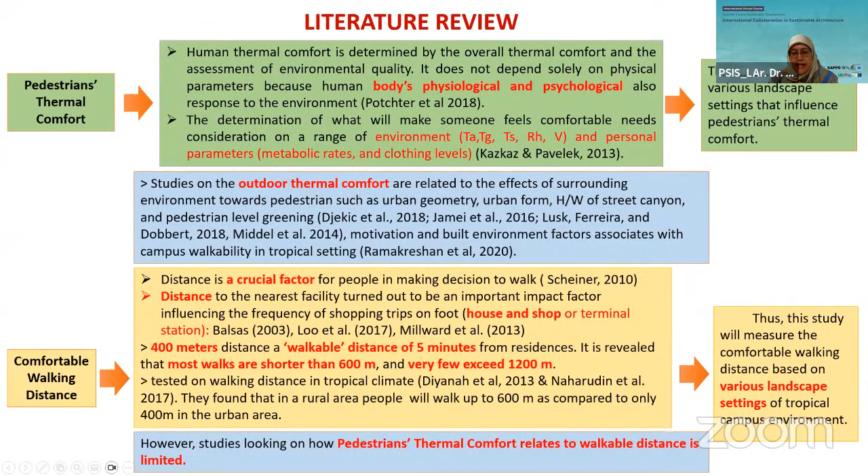So this study will measure the comfortable walking distance based on various landscape settings of a tropical campus environment. However, studies on how pedestrian thermal comfort relates to walkable distance are limited.

Now I will explain the Landscape Environmental Setting for Pedestrian, which is LESP. This term was coined by Kasim et al. 2018. This is sourced from my 2018 paper, 'Use of Landscape Environmental Setting for Pedestrian to Enhance Campus Walkability and Healthy Lifestyle,' published in WIT Transactions on Ecology and the Environment.

Based on this study of 5 campuses in Malaysia, 5 types of LESP were identified: type 1, type 2, type 3, type 4, and type 5. For type 1, there is no shade at all. From the illustration, we can see only pavement is the landscape element in the walkway environment, alongside a human figure. Actually, LESP is a microclimate for pedestrians when they walk, either on a campus or in a city.

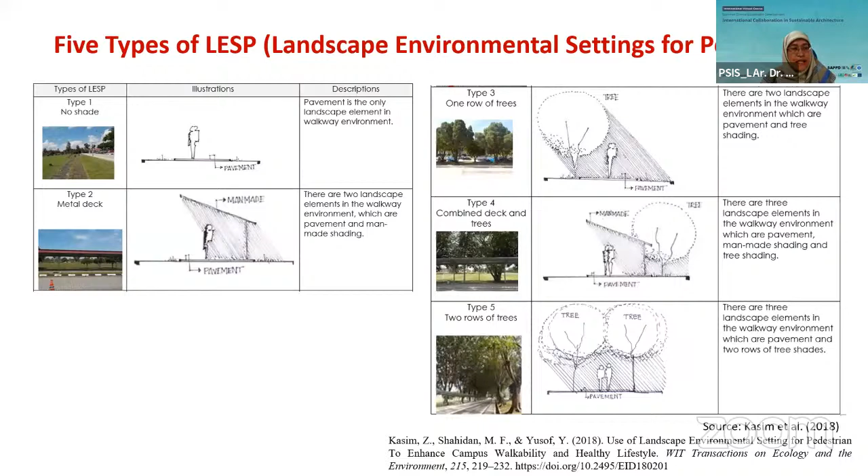After identifying the 5 types of LESP, we did field measurements of 5 microclimatic parameters, which I mentioned just now: air temperature, surface temperature, globe temperature, velocity, and relative humidity, at the 5 types of LESP on a campus in Malaysia.

For the parameters, we used apparatus that are easy to carry - five instruments used across all 5 types. For this data collection and field measurement, we did it at the same time for all these 5 types.

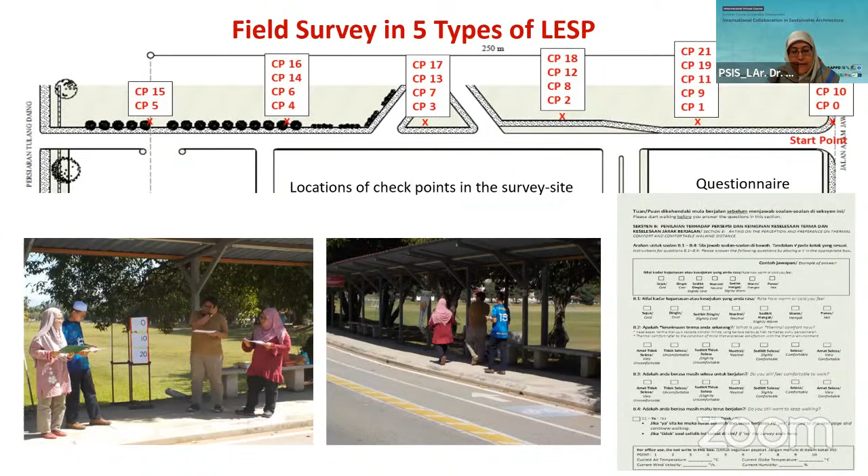Then the summary result of the survey for all types of LESP in the study, using the mean. The question B1 is for the thermal rate, TR; TC is thermal comfort, question number 2; question number 3, walking comfort; and question number 4 for walking distance. Sorry. So this slide already has LESP type 5 first; I arranged it accordingly.

For the thermal rate, slightly cool, thermal comfort slightly comfortable, walking comfort slightly comfortable, and surprisingly the comfortable walking distance, when rounded, is around 1 kilometer. Pavement and 2 rows of trees in LESP5 are the landscape elements in the walkway environment. Results from field measurement and field survey agree with the prediction that pedestrians felt most comfortable and walked longest in this type of LESP environment. Trees with dense and wide canopies act as a shading device, moderating heat transfer from direct solar radiation to the ground.

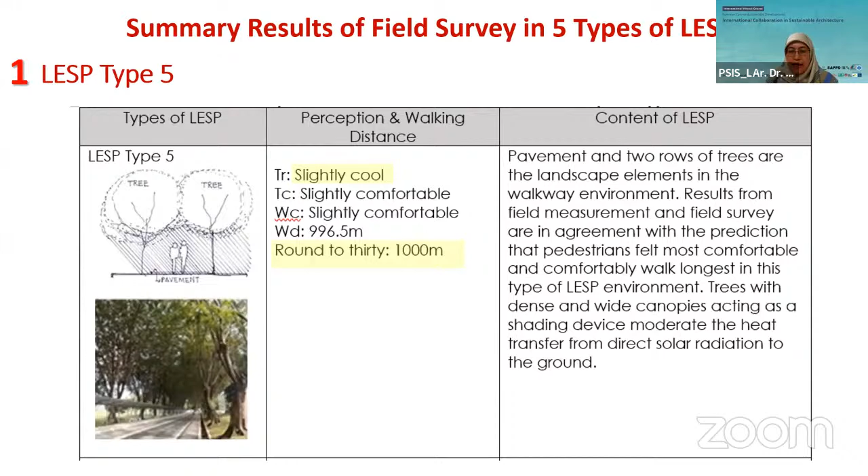Next, the second LESP, type 4. The thermal rate is neutral, thermal comfort also neutral, and walking comfort neutral, meaning the participants feel neutral. The comfortable walking distance is 800 meters. Pavement, trees, and man-made shade are the landscape elements in the walkway environment. The field survey shows participants felt better for TR, TC and WC, rating neutral on all three factors. Both results are similar to the earlier prediction that pedestrians will feel comfortable in this type of environment. This result proves that trees and man-made shading, a covered walkway, provide a comfortable walkway environment.

Okay, for the LESP type 2, for the thermal rate, slightly warm. For the thermal comfort and walking comfort, they feel neutral. And the comfortable walking distance is 650 meters. Pavement and man-made shade are the landscape elements in the walkway environment. Results indicate that man-made shading, which is a covered walkway, does provide a comfortable walking environment.

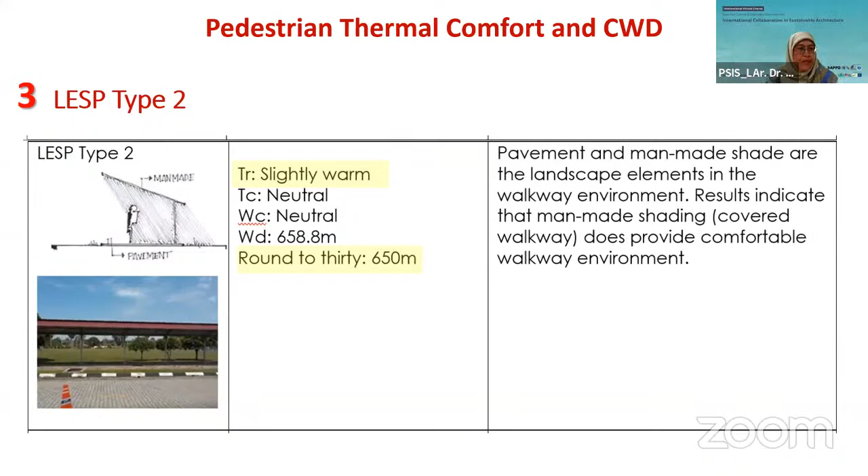Okay, and number 4 is for LESP type 3. For the thermal rate, thermal comfort, and walking comfort, they all felt neutral. And the comfortable walking distance is 630 meters. Pavement and trees are the landscape elements in the walkway environment.

Results of the field survey show that participants felt neutral for TR, neutral for TC, and neutral for WC. The results suggest that trees are a significant influential factor in the perception of pedestrian thermal comfort. Results suggest that tree shading provides a comfortable walkway environment.

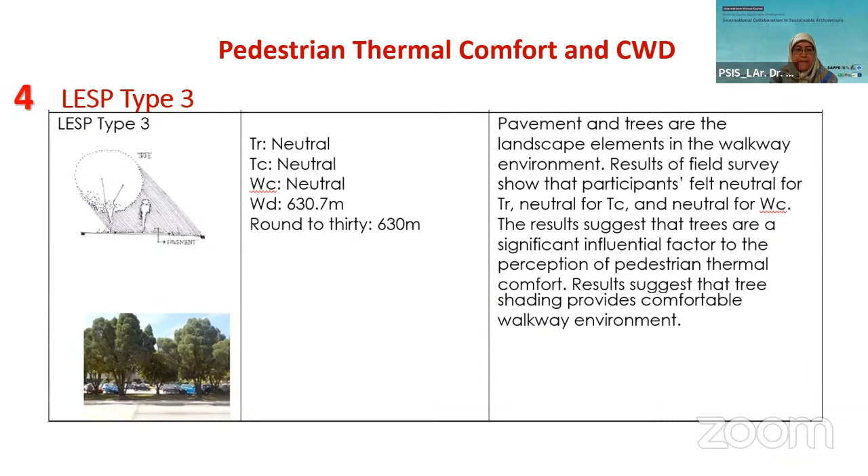Okay, last, number 5, LESP type 1. This one we already know. For type 1, the thermal rate is warm, thermal comfort uncomfortable, walking comfort slightly uncomfortable, and the comfortable walking distance is only 330 meters.

So in this LESP type 1, pavement is the only landscape element in the walkway environment. The results indicate that LESP type 1 creates a hot environment leading to heat stress and does not promote walking comfort for pedestrians. Okay, for the conclusion,

it is important to modify the solar radiation in the walkway environment by having continuous shade from trees or man-made shade, which is a covered walkway, together with tree shade along the walkway. Because, as we saw from the results, man-made shading structures can provide full shade, but the heat reflected from their surfaces can be quite considerable. Trees, however, provide an additional cooling effect as they reduce radiation and provide additional cooling through evapotranspiration.

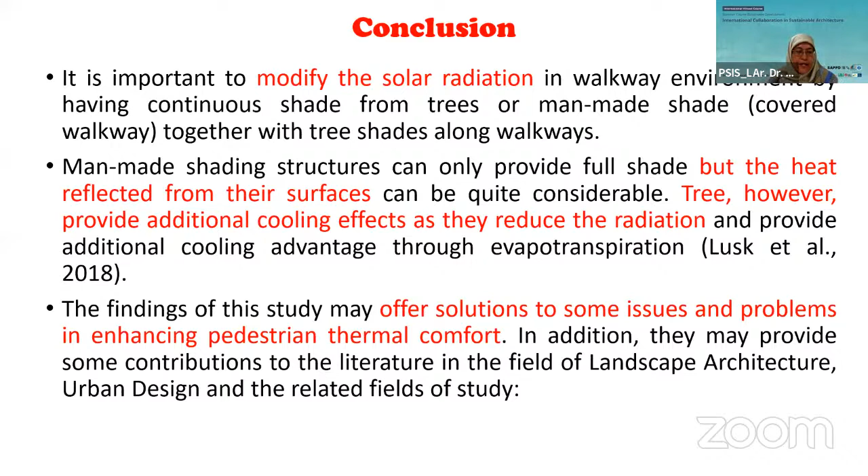Okay, then the findings of the study may offer solutions to some issues and problems in enhancing pedestrian thermal comfort. In addition, they may contribute to the literature in the fields of landscape architecture, urban design, and related fields of study. And last, the conclusion:

identification of landscape and urban setting for pedestrian, or LESP, types in a tropical campus environment, because with this LESP, the designer or the campus management can plan accordingly based on the results of this study. Establishing the relationship between landscape and urban setting and pedestrian thermal comfort. Establishing the relationship between pedestrian thermal comfort and comfortable walking distance in all types of LESP. And finally, it has expanded the guidelines for providing pedestrian thermal comfort on pedestrian walkways in tropical climates.

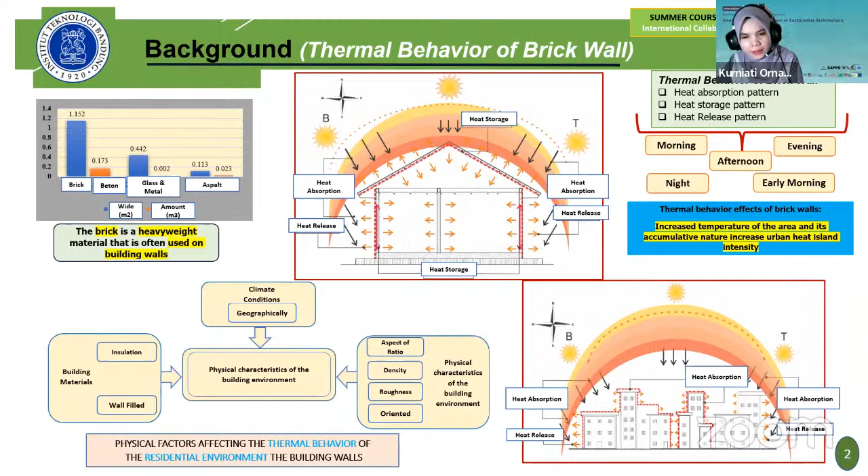And then many literature reviews have been conducted on mitigation technology, such as building shading through self-shading, and vegetation techniques. Additionally, there are methods like replacing heavyweight materials with lightweight ones, using high-performance glass, employing double skin facades, thermal insulation techniques, and engineering the building skin to reduce surface temperatures. However, these methods have not been very effective in controlling the heat in brick walls.

The heat that gets stored in brick walls can be managed by controlling how much heat they absorb from the sun and how they release that heat to avoid overheating. To solve this problem, we need mitigation strategies that follow the laws of thermodynamics, which focus on balancing heat and energy in the walls. This means managing how the heat is absorbed, stored, and released from the brick walls.

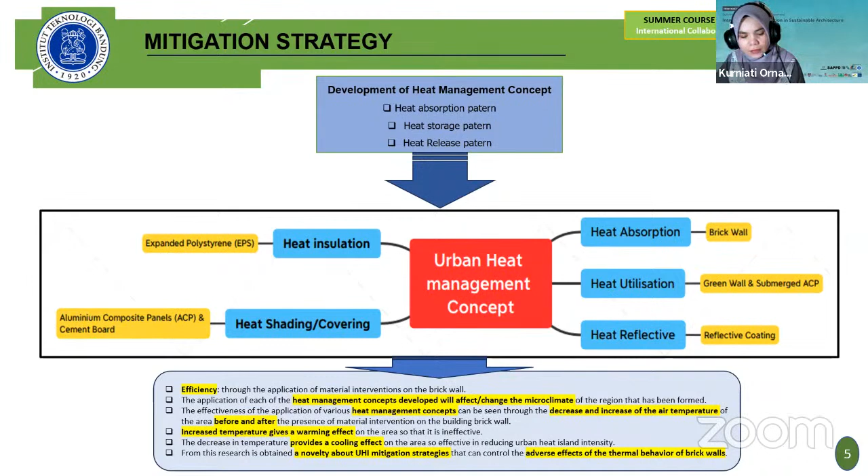And then this research is all about finding ways to reduce the urban heat island effect by managing how brick walls handle heat. We'll try different materials like green wall, submerged ACP, reflective coating, ACP, cement board for shading, and EPS for insulation. We want to see how these materials affect the thermal behavior of brick walls and if they can change the local climate in the area. By comparing temperatures before and after using these materials, we can see if they cool down the area and effectively reduce the urban heat island effect.

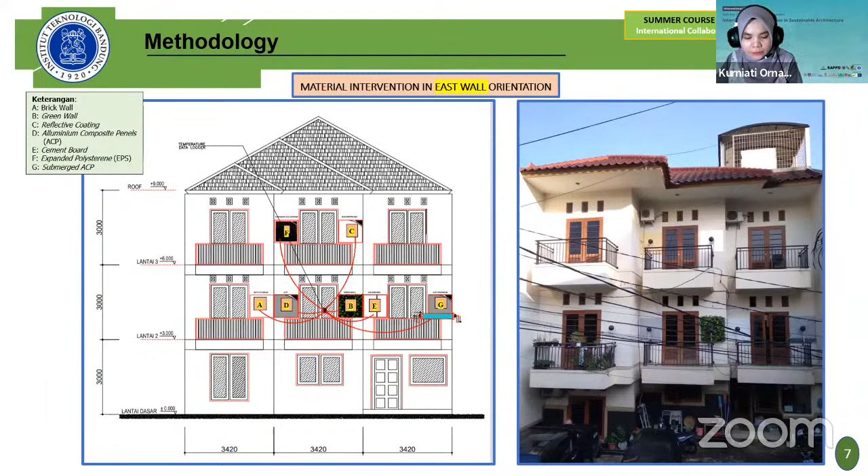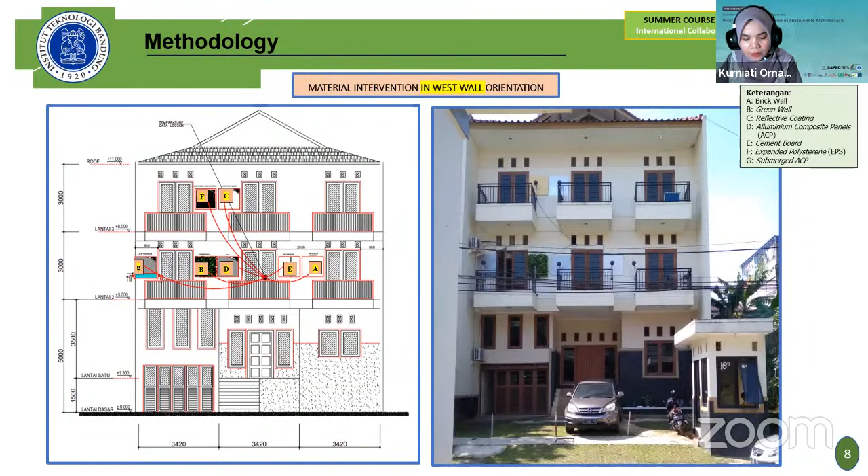on the brick walls. And then the second step involves applying this material intervention in a residential area to see how effective they are in reducing the air temperatures of the entire area. We'll use ENVI-met simulation for this. We start the simulation by modeling the layers of this intervention material on the brick walls, keeping the thermal properties the same as measured directly.

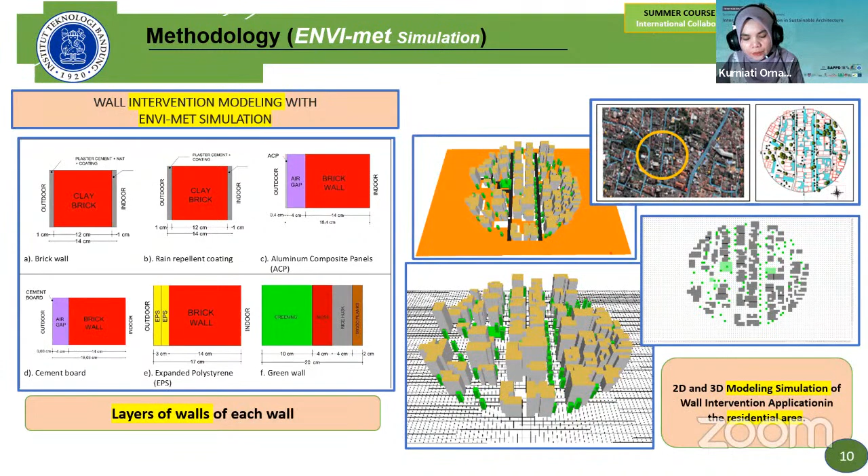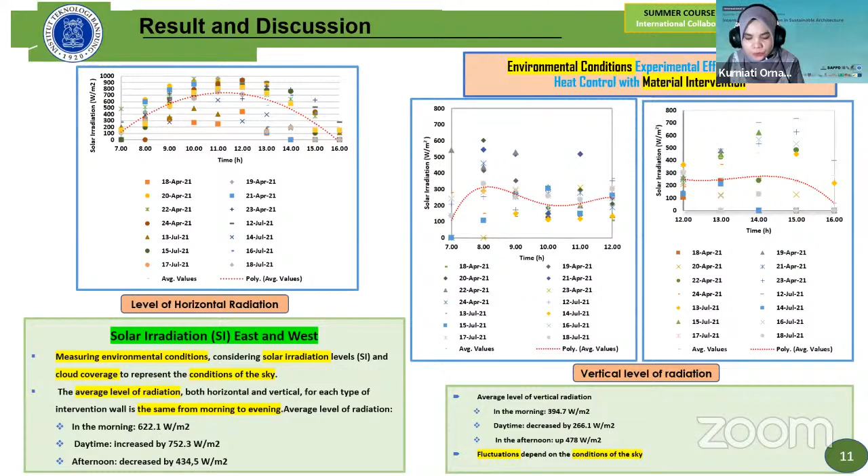Horizontally, for all types of intervention, we observe that the temperatures are higher during the daytime and decrease significantly in the morning and evening. On the other hand, vertically, the temperatures are lower during the daytime compared to the morning and evening, and this fluctuation depends on the sky condition.

And then the sky conditions are categorized based on cloud cover percentage. In the morning and daytime it is mostly partly cloudy, and during the afternoon to evening it is mostly cloudy. The sunlight is affected by the cloud cover. Morning and afternoon are usually cloudier because the wind is lower compared to daytime.

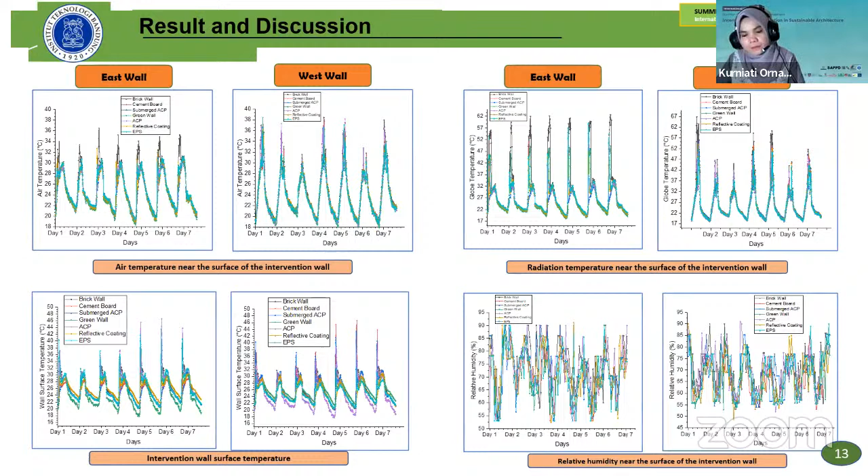In the absorption concept, the reference brick wall saw a cooling effect on the east wall in the morning, but not on the west wall. The surface temperature results indicate an infrared emissivity phenomenon from the wall where heat is released. This causes the globe temperature and air temperature values to increase and be the highest compared to other material interventions, showing heat transfer through conduction and demonstrating the thermal behavior of the brick wall.

In the thermal absorption concept on the brick wall, we notice that in the morning, air temperature and surface temperature values are the same, but globe temperatures differ significantly. This means that the wall surface gets a lot of sunlight, but the surface temperature value doesn't increase much, indicating that the brick wall absorbs and stores heat. During the daytime, the heat storage effect raises both surface temperature and air temperature values.

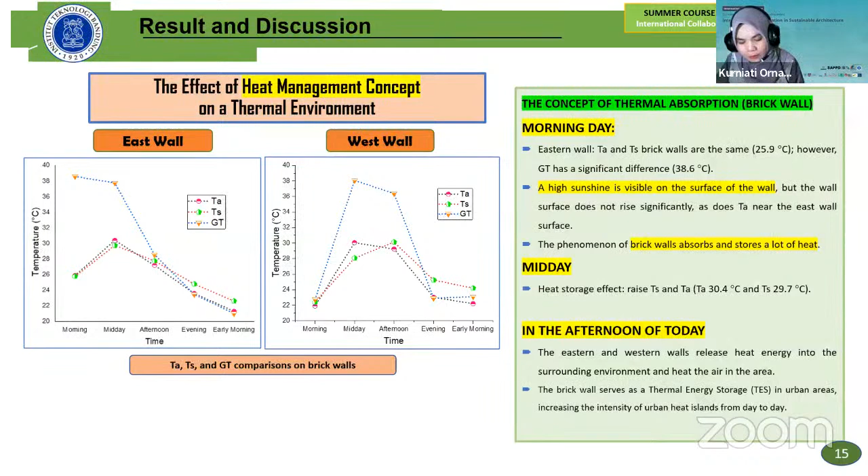However, from afternoon to evening till morning, both the east and west will release heat to the environment, warming up the air in the area. We saw that the brick wall acts as a thermal energy storage in urban areas, contributing to the increase in urban heat island intensity.

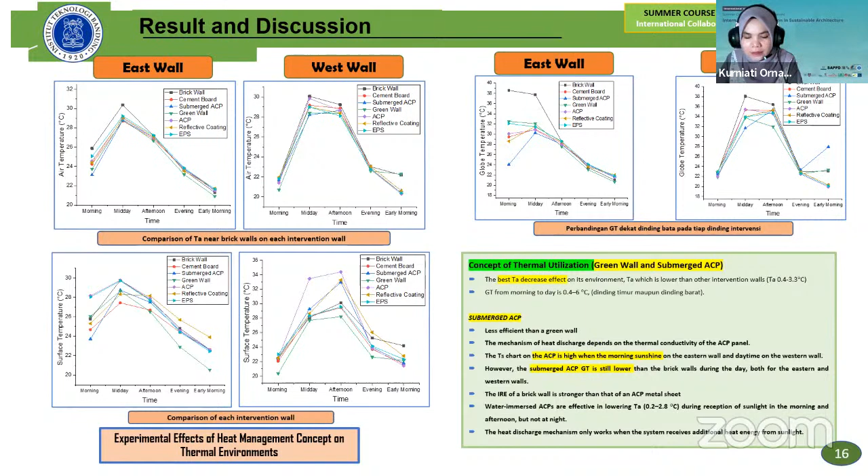And then in the thermal utilization concept, the green wall saw the best cooling effect on its surroundings throughout the day, with air temperature being lower than other interventions. On the other hand, the submerged ACP has a lower effectiveness compared to the green wall because of its thermal conductivity performance. However, we can see that the infrared emissivity of the brick wall is still higher. The submerged ACP is effective during sunlight exposure in the morning and afternoon, but not during the night. It can only release heat when it receives thermal energy from the sun.

In the reflective concept, it effectively lowers air temperature, surface temperature, and globe temperature when the sun is at a low angle, like in the morning and afternoon to evening. However, during the daytime, when the sun is directly overhead, it can risk the intervention on the walls. The silver reflective coating has a high albedo value, which means it can reflect heat. The surface temperature value decreases on the east wall from morning to noon, so its infrared emissivity is lower than

the brick wall. In the thermal shading or covering concept, adding aluminum composite panel and cement board to the brick wall surface can block the heat absorption from solar radiation. The surface temperature value gets high when the surface is exposed to sunlight. ACP, being a metal sheet, reaches the highest surface temperature value during the daytime, even higher than the brick wall, but it cools down faster at night, making it more effective in the morning and afternoon to evening.

Cement board with a larger thermal mass than ACP can absorb heat and keep surface temperature from rising, resulting in air temperature being lower than the brick wall. But ACP and cement board also don't release much infrared emissivity to the environment, with reasonable globe temperature value. Both ACP and cement board have an air gap between the layers, which acts as evaporative cooling, but is not enough to keep the ACP's higher temperature low.

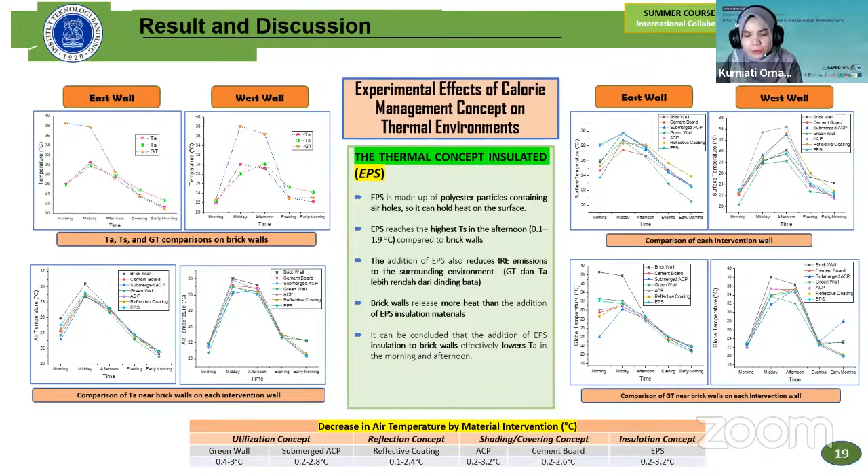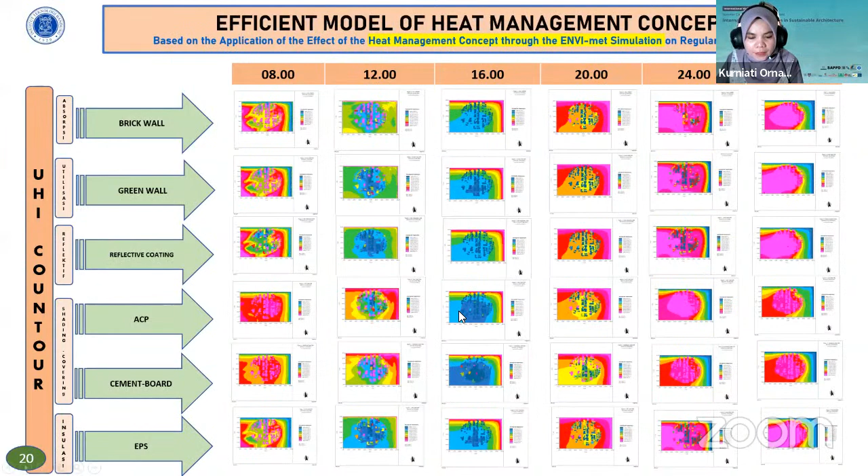And then by simulating the air temperature in the area for 7 days by 24 hours, we can see the effectiveness of each heat management concept through the contour results shown in the slide. And then the covering panel concept for ACP and cement board results in the highest air temperature of up to 35.6 degrees Celsius. It confirms the direct measurement, showing the surface temperature of ACP is greatly influenced by morning sunlight on the east wall and the radiation level during the day on the

west wall. The simulation result for the covering panel shows the overheating skin phenomenon, indicated by high wall surface temperature and air temperature on the intervention wall. Adding reflective layers, additionally covering and thermal insulation on the brick wall surface reduce the negative effect of the brick wall by reflecting or blocking direct sunlight and reducing heat storage. It's clear that air temperature for covering, insulation, and reflective layer is lower than that of the brick wall and confirms the direct measurement. And then covering and thermal insulation show a slightly different performance compared to the reflective layer.

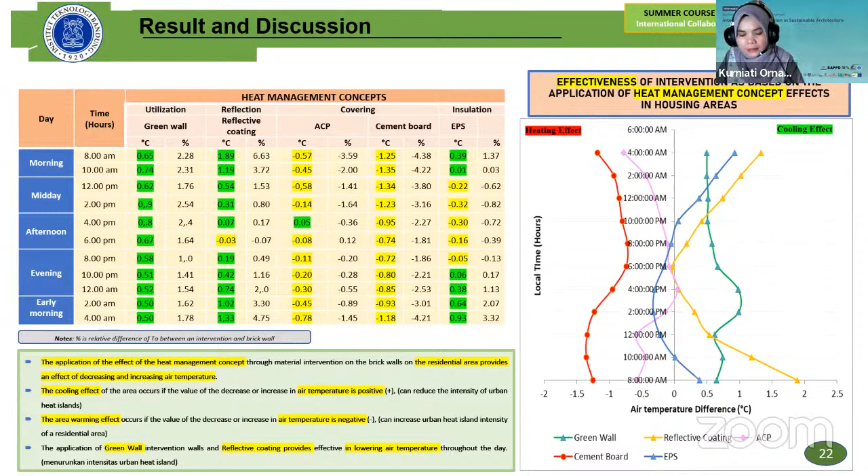Here's the conclusion that can be drawn. Building walls significantly influence the intensity of urban heat island. This heat management concept for building walls causes fluctuation in the surrounding area. Thus, appropriate intervention on brick walls in residential areas can reduce urban heat island intensity.

Intervention on brick walls can serve as an urban heat island mitigation strategy. Heat absorption concept in brick walls increases air temperature day and night. Thermal insulation on the west wall yielded positive results, particularly during cloudy days and low solar radiation conditions.

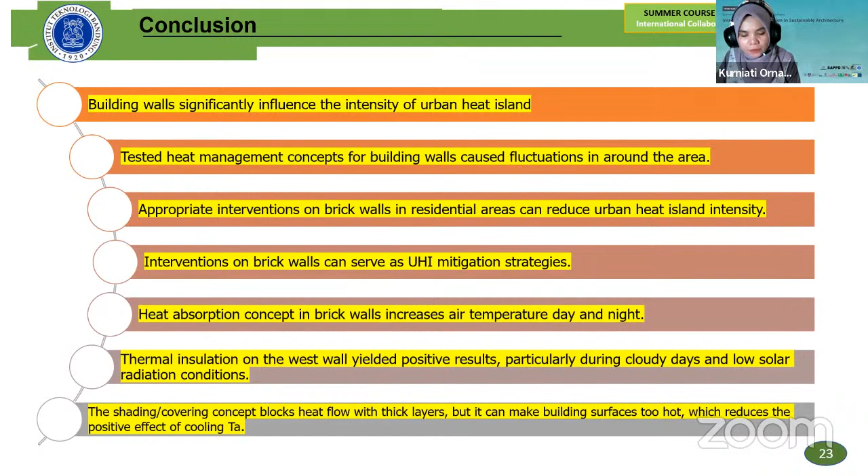In shading, covering blocks heat flow with thick layers, but it can make the building surface too hot, which reduces the positive effect of cooling air temperature. Green walls and submerged ACP with thermal ventilation effectively absorb and release heat, reducing urban heat island intensity throughout the day. Green walls use heat during photosynthesis and evapotranspiration, resulting in lower air temperature in the surrounding area.

The facade system in the thermal utilization concept acts as a heat modifier. Both thermal utilization concepts lower air temperatures all day, making them the most effective for urban heat island mitigation. So the utilization concept is the best for urban heat island mitigation.

It lowers UHI by up to 1.6%, from 0.15 to 0.99 degrees Celsius, beating other concepts like reflective facade. Using heat utilization and reflective concepts to reduce urban heat island provides a comprehensive solution.

It effectively lowers temperatures all day and works well in residential areas, offices, and organized site business clusters. Also, it promotes sustainable building practice with material choices that are cost effective, low maintenance, sustainable, and aesthetically pleasing.

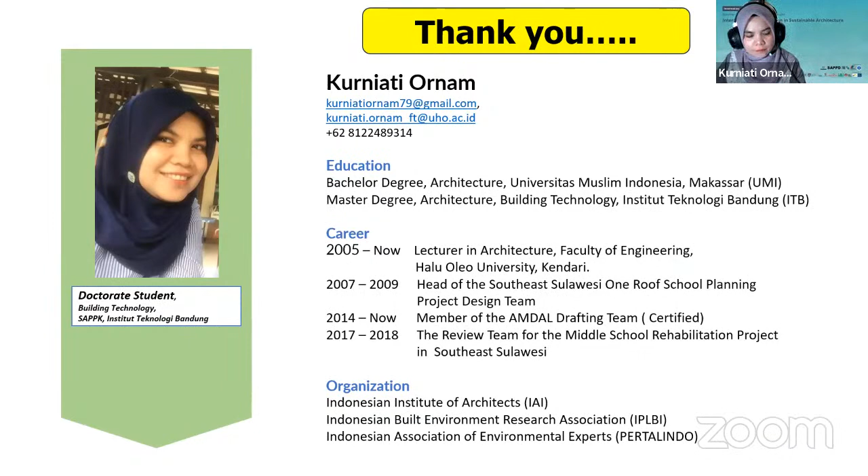So how different materials or wall technologies give different impact in mitigating urban heat island effect in buildings and in urban areas, which, what I understand, is green wall gives better performance in reducing air temperature compared to the other interventions.

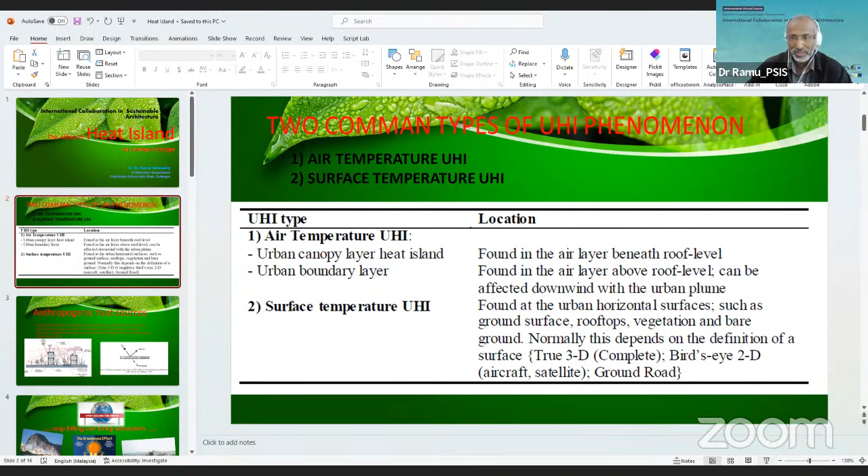Very good morning, can you hear me? Yes, clearly. Okay, so let me share my slide first. Okay, is the slide visible? Yes, you can just click full screen. Yeah okay good, yeah, okay.

Okay, first of all, thank you for inviting me. I'm the one and only, I think, male presenter today. So my name is Ramu. As stated in the poster, I'm from Polytechnic Sultan Idris Shah. Actually I just recently transferred to Polytechnic Ungku Omar 2 weeks ago, so currently I'm at Polytechnic Ungku Omar.

So I'm going to be presenting the topic related to heat island, okay? And we can see previous speakers also mentioned a lot on the heat island. So actually when we look into this heat island, it's more on the macro scale. When we go into micro, it's more on hotspots, several hotspots in space that accumulate and become a heat island. Actually the heat island issue has been detected way back in the 19th century, 1822. This is not very new, 200 years ago they already detected it.

So we will go to the second slide. Okay, so what is this heat island about? Commonly, heat island has two types. The first one is caused by the air temperature, ambient air temperature. That means when you go to a place and stand there, you feel not comfortable, you feel like it's too hot. That is air temperature.

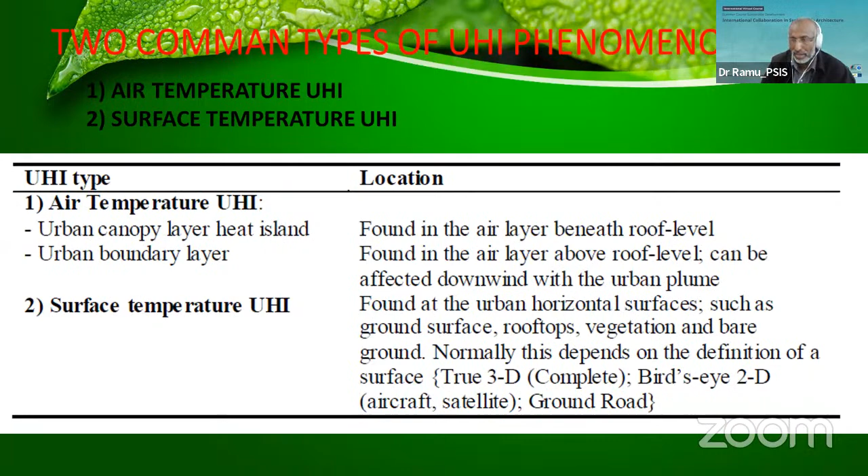When we look into this urban heat island, these anthropogenic heat sources are the main heat sources that cause this heat island. This heat is controllable, meaning we can control its quantitative level.

The heat island is considered one of the major problems in the 21st century posed to human beings, as a result of two things: urbanization and industrialization of human civilization. We cannot run away from these two terminologies. The first is urbanization, where we have mega cities. The second is industrialization, where we are almost passing by IR 4.0 and entering 5.0, so there is a lot of anthropogenic heat happening.

What is this anthropogenic heat all about? Let me take one example. When we turn on an air conditioning system in a building, looking at the M&E, mechanical and electrical systems, we have several types of air conditioning, ranging from unitary to centralized systems. In a centralized system we have our own plant room. With a split system, you have an indoor unit and outdoor unit, and you can see the outdoor unit attached to the outer layer of the building. When you turn it on, you can see the compressor, hear its sound, and it will produce heat. That is one of the anthropogenic heat sources.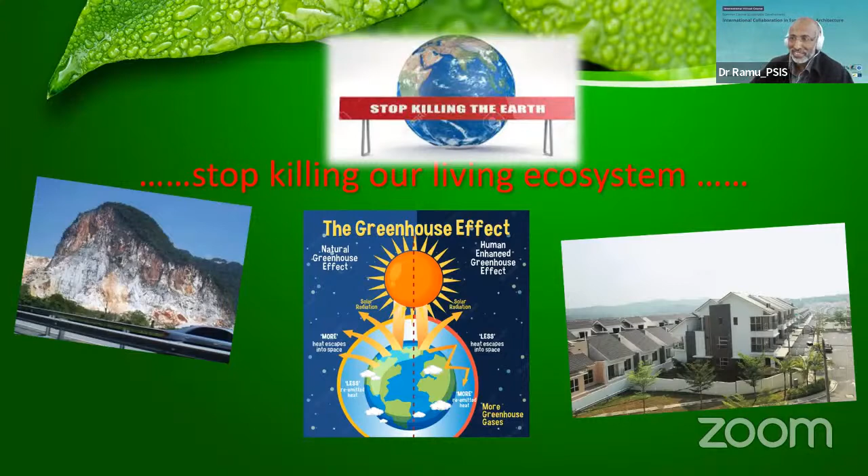Let's go to the following slide. This is what we call the heat island. We can see the temperature, the ambient temperature. The ambient temperature goes up. In rural areas, the surface ambient temperature usually will be around 28 to 29 degrees, and it can go up to 34 or 35 in urban mega cities. That's why when we get out of a car in the afternoon, sometimes we feel so giddy, and we feel like running away into a building full of air conditioning.

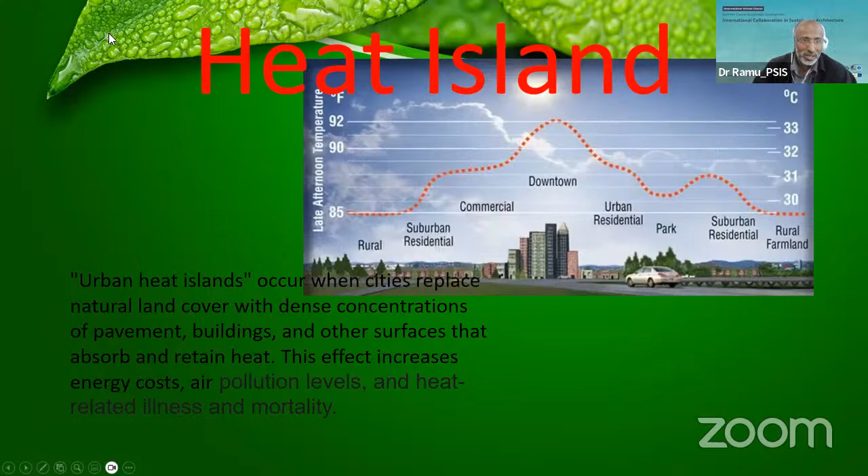Okay, so this is all about this heat island. And before we go, what we are looking at is the processes of heat transfer in the atmosphere. We have 3 processes. These are the 3 processes that happen in a heat island situation.

The first one is conduction. Conduction, as we know, the heat is transferred from one area to another area. So how are we going to block it? How are we going to cut it? How are we going to stop it? So all these things have to be measured quantitatively to reduce the heat island.

And then we have convection. When we look at the concept of convection, the hot air will go up, the cool air will stay down, and there will be a rotation. That is convection, and we call this the stack effect. When you look into the Malay traditional house, you can see there is a jack roof on the top. They design the jack roof to make sure that the hot air can go out.

So the best ecosystem design for Malaysia is the Malay traditional house. So this is convection, how we can use convection in the design. Later on, we look into the campus design, how this convection can be used in the building design.

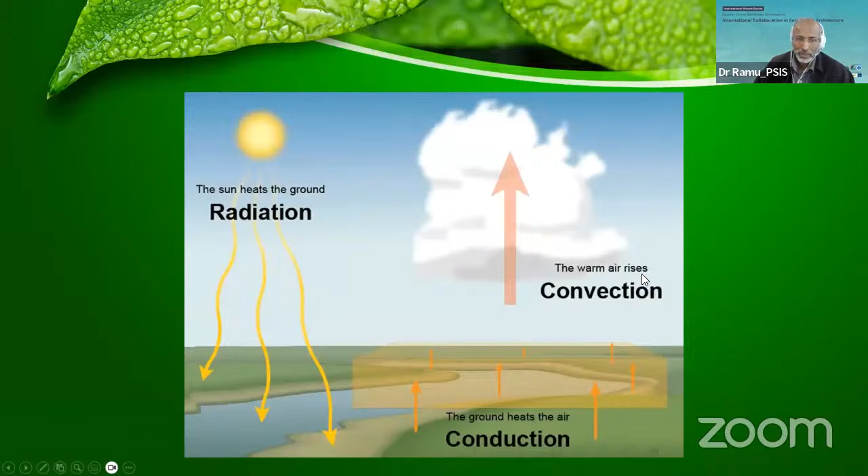So these are several processes that might happen in rural areas and also in urban areas. We have radiation, we have convection, we have conduction. So these are two scenarios that I'm going to show you. The first one is villages, we call it kampung in Malaysia, and the second one is the current housing scheme.

When we first look into it, we can see the villages are very green. They have a lot of trees. The trees are not uniform, what I mean is there will be up and down. There is what we call LAI, leaf area index. There are trees with a 6.0 leaf area index, that means it's very compact, and there are trees that only have a 0.7 leaf area index. We can see how this leaf area index works very simply.

When you go under a tree, you look at the sky. If you are able to see the sky, that means a very low leaf area index. If you cannot see the sky, everything is shaded by the leaves, that means that tree has a very high leaf area index. Usually we will use fisheye lenses to see the solar penetration. Okay, so we go again.

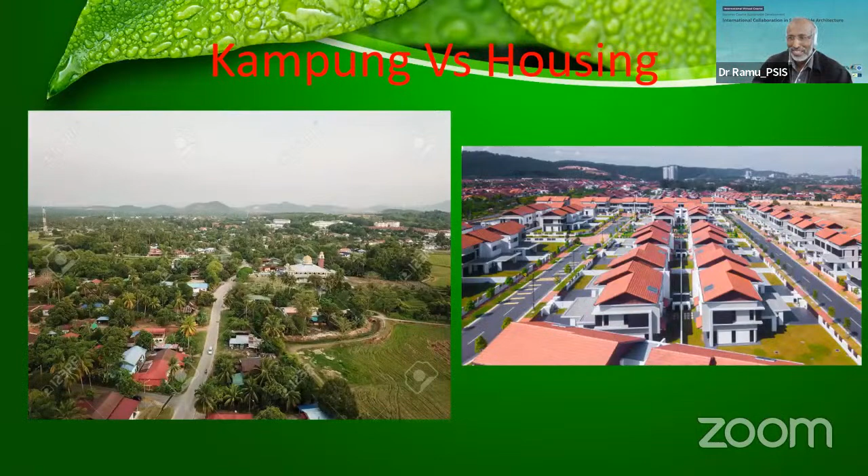The humidity level, when we correlate it with the ambient temperature, has a negative correlation. That means when you increase the humidity, the ambient temperature will go down. So when you decrease the humidity, the ambient temperature will go up. So we have a very simple formula for how to reduce the ambient temperature. Okay, so we go to the second slide.

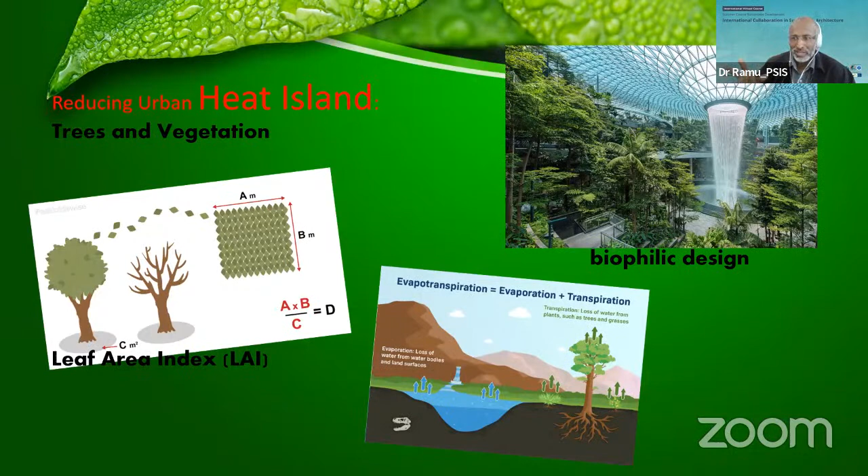Why do we want to use biophilic design? Because the concept is very simple. It's going to increase the humidity level. As I mentioned previously, the evapotranspiration process. You have to increase that. Okay, can we do it artificially?

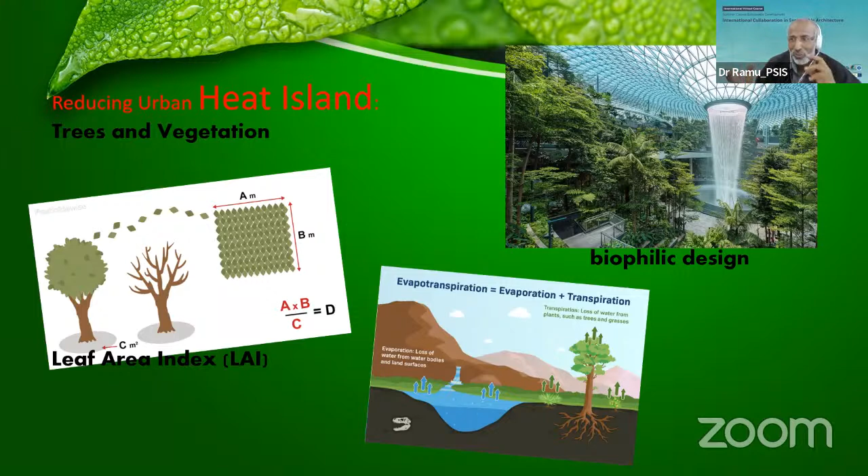There are two approaches: technocentric and ecocentric. When we plant all these trees, that is ecocentric, more ecology focused. When you try to use mechanical design, that is technocentric. So it depends on the architect which approach they're going to use. Okay, good. And the following one is the roof.

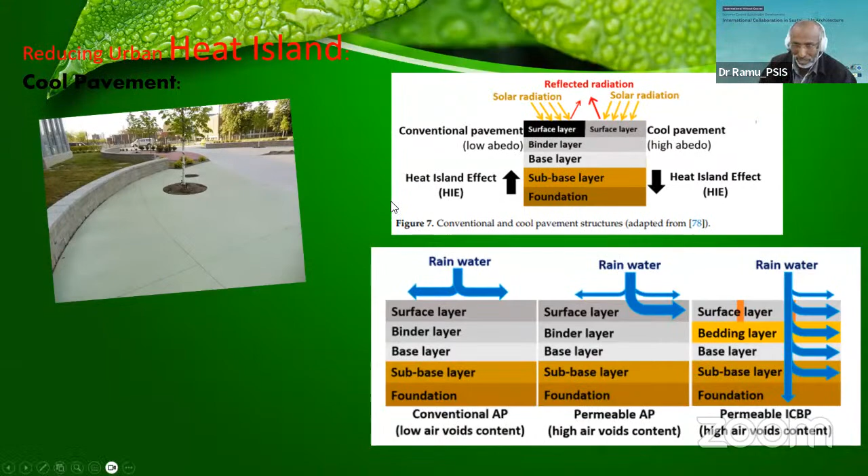People are doing PhDs just to get the perfect attributes of this pavement. There is a lot of pavement currently. Can you see this? These are the types of pavement they are currently using. Everywhere they want to use premix asphalt. Instead, they go into this kind of capsule where there is small grass, a bit of space to let the water be absorbed. It's like a sponge; the soil is like a sponge. Very simple.

That's why when you go into a design, you can see how many hotspots you are creating. So the best thing is to try to reduce the hotspots. When we manage to reduce the hotspots, you're controlling the urban heat island. Once we control the heat island, we control the formation of clouds on top. So there is a lot of correlation here.

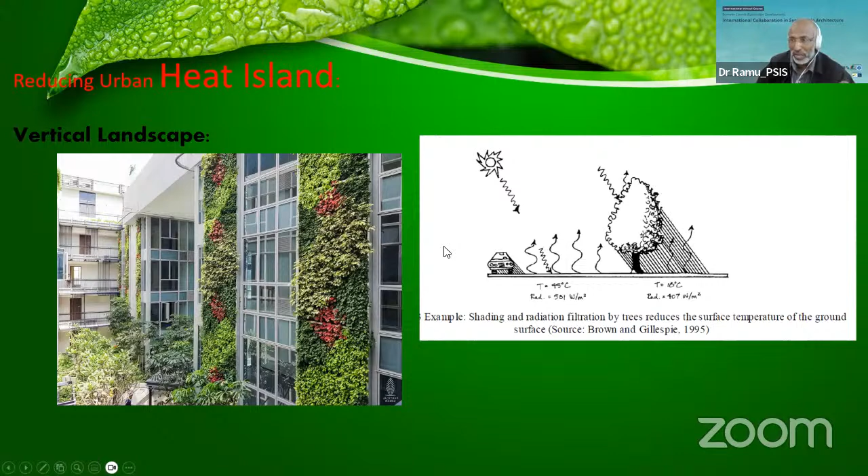You can see the temperature goes up to 45, and if it's shaded with a tree, it's just 28. That's why when we drive to a street with big trees on the left and right, we feel so cool; it reduces the temperature on the surface. So this is one of the ways we're going to reduce heat absorption.

Actually there is a lot more to talk about. There's the osmosis effect, a lot of things we can mention here, but we will try in some other session. What I'm telling is not very quantitative; it's very general. If I go very quantitative, it will be very scientific.

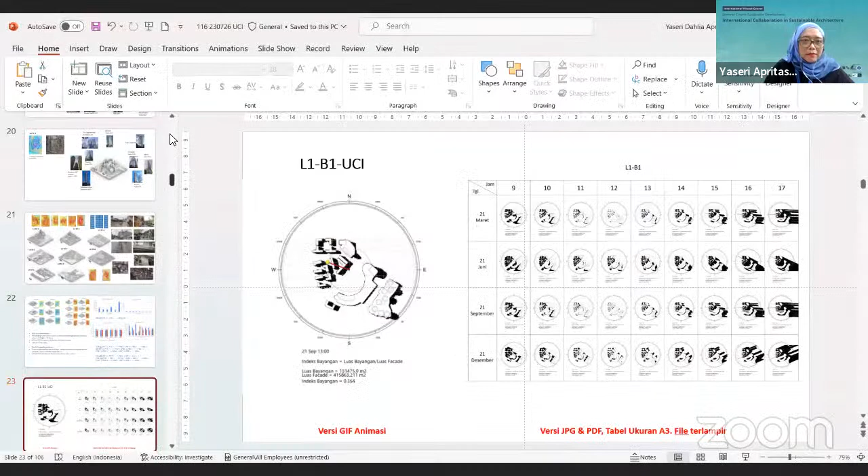My PhD research is the role of geometric and material factors in dense urban areas as urban heat island mitigation. My supervisor, my promoter, is Professor Suryamanto Wonoraharjo, and co-promoter is Astrid Indra Prasta, PhD.

I want to explain first my structure presentation. Okay, the first is introduction, the second research methodology, the third thermal interpretation, the fourth field study, the fifth simulation, and the last conclusion.

I want to explain first. I love my research based on my hobby. I love traveling abroad, many countries already visited, and I do love traveling and culinary, exploring new places, walking around the city, seeing and feeling the ambience of the city. The first time I was curious how to form and design outdoor thermal performance, especially in Jakarta, because I live in Jakarta.

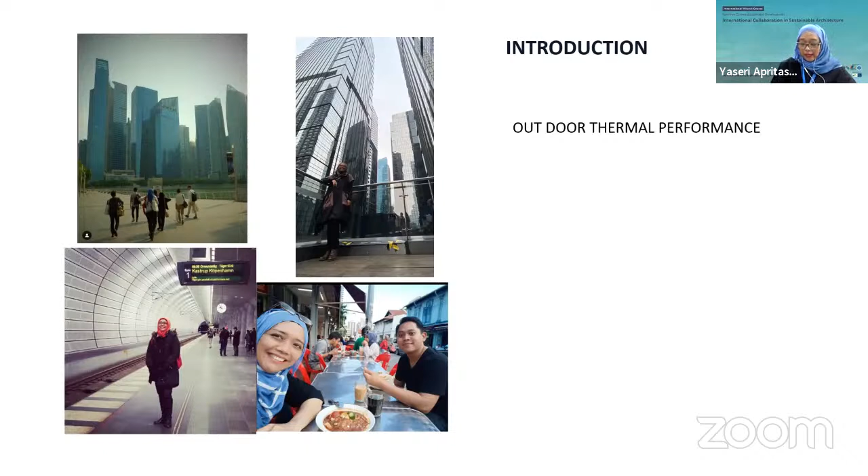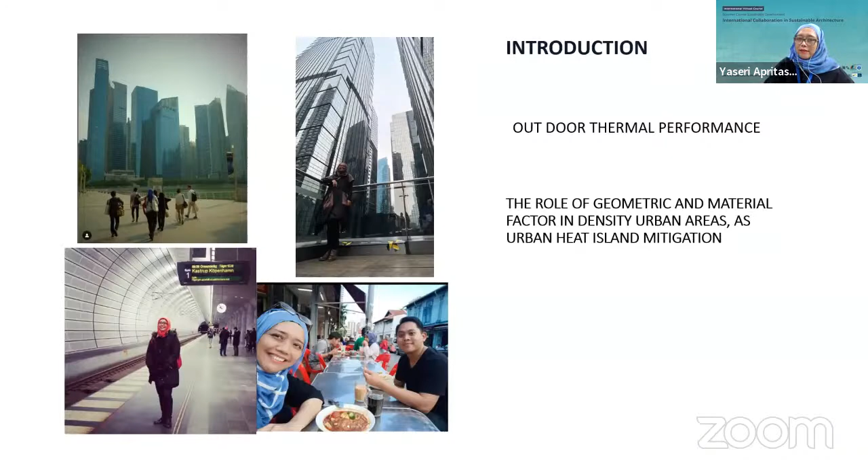After discussing with my co-promoter, he suggested me to explore microclimate, and we found the title, The Role of Geometric and Material Factors in Dense Urban Areas as Urban Heat Island Mitigation. First, I did a structured literature methodology to find the research gap. I explored many papers with the keywords urban heat island, heat mitigation, urban geometry, and urban material.

The result of the structured literature for urban geometry, I found the distribution of urban heat island mitigation technology for geometry. The highest distribution is about urban canyon, urban density, orientation, and the lowest, the shape of the roof. For urban material, the most research is about horizontal material, pavement material, park, roof material, and vertical material, facade material. And for the climate, the highest is subtropical climate, and for tropical and hot dry, it's about 15%. I think it's very limited for exploring urban heat island in the tropics.

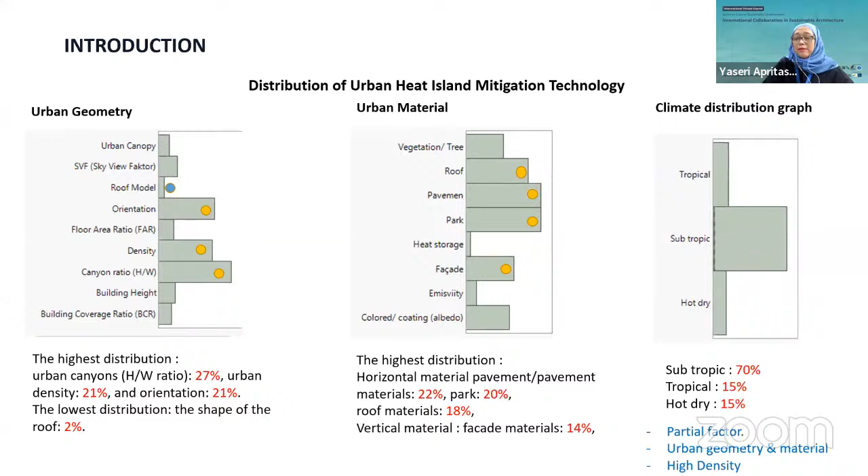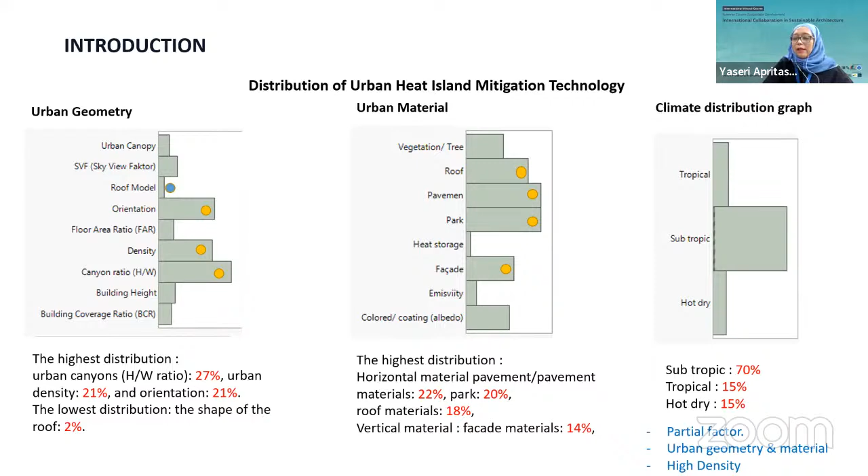I found the research gap: many studies explain partial factors, and I focus on merging urban geometry and material, in high density locations and tropical climate. This is my research aim. The first, to identify the condition of the thermal environment in high density urban areas. The second, to identify differences in hot and cold thermal conditions in high density urban areas. The third, to explore the achievement of the thermal environment in high density urban areas. And the last, to formulate geometric and material factors in high density urban areas as urban heat island mitigation.

We can see the illustration. Actually, it's a strategy to use urban heat island mitigation technology. The first, intervention in the lowest urban heat island intensity, can form a breezeway to increase wind speed, and then the wind can reduce the urban heat island intensity. The second, intervention in the highest urban heat island intensity, can decrease the temperature of the urban heat island.

This is the basic concept. The first is about thermodynamic heat transfer, and the second is about air pressure in urban areas. Heat transfer, heat balance, or thermodynamics: the change in surface temperature and humidity results in change in local airflow dynamics. The process of heat transfer and thermodynamics is related to changes in urban surfaces, urban geometry, and materials. And air pressure is a parameter associated with variation in wind direction, wind speed, the shape of the thermal environment, and air pressure depends on solar radiation and temperature.

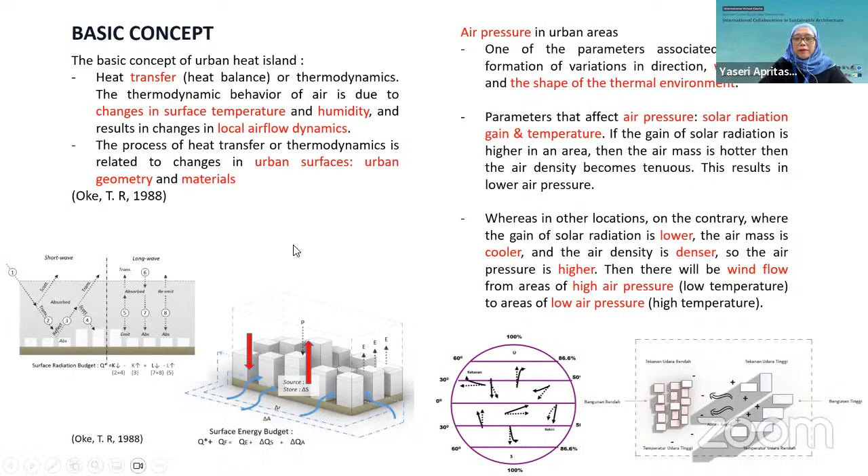And then, research methodology. The research methodology is divided into two phases. The first phase, a quasi-experiment to identify heat island and cool island phenomena. And the second is the true experiment through simulation. For the quasi-experiment, I did two experiments. The first one through spatial interpretation with 30 meter resolution of the thermal environment, with comparison analysis of thermal image overlay. This is for identification of high and low surface urban heat island intensity.

The second, confirmation of the spatial resolution interpretation with field measurement, thermal environment analysis, and mean comparison and correlation. We did confirmation and validation, and the result of phase 1 is the characteristics of geometric and material factors.

Based on phase 1, we move to phase 2. The result of phase 1 is based on true experiment simulation. We use CFD Autodesk with the intervention geometry, the area density, orientation, variability of building height, material, softscape, and pavement. And we did analysis: correlation, comparative, thermal environment analysis, spatial and temporal analysis.

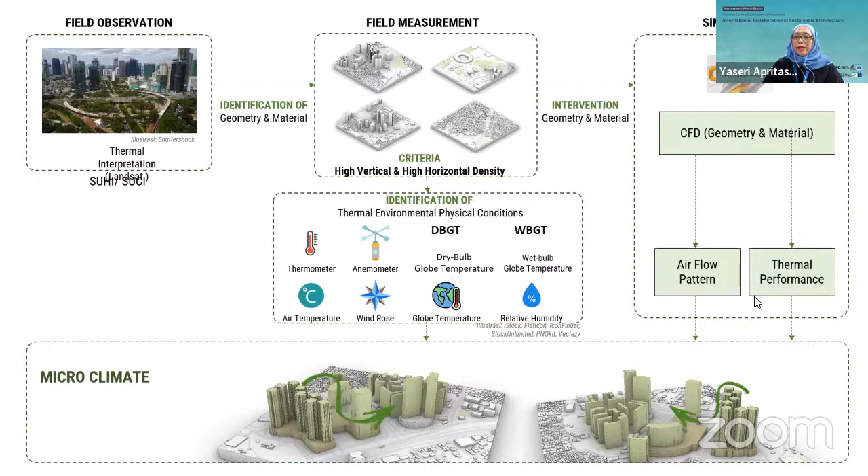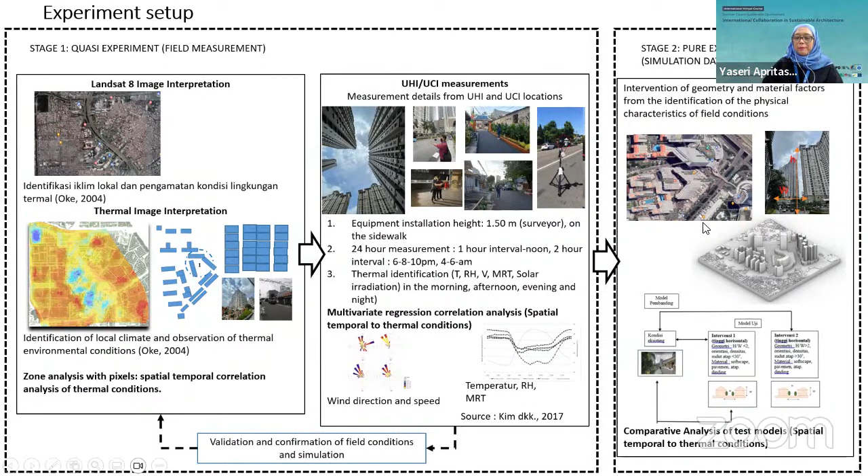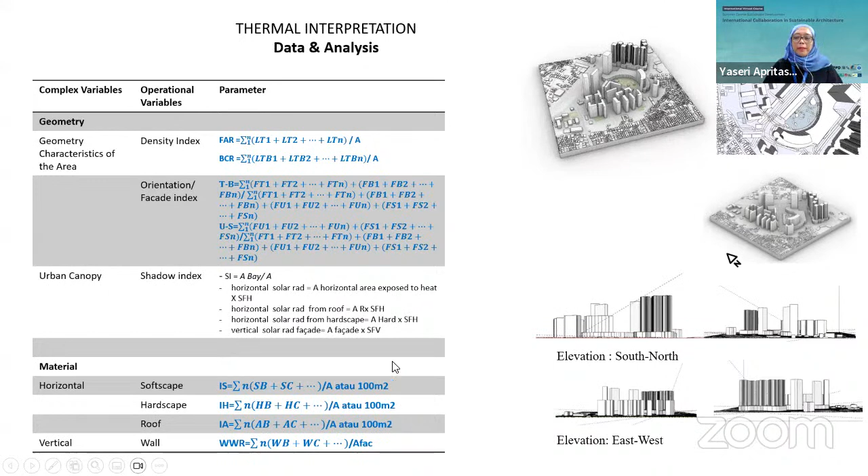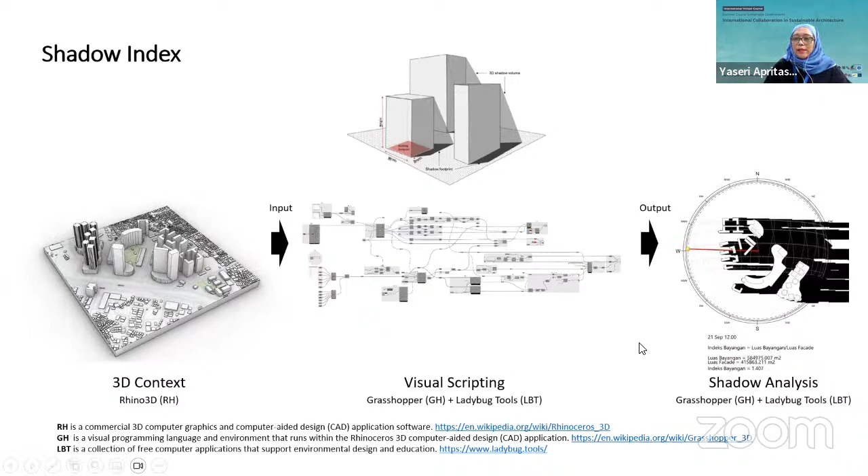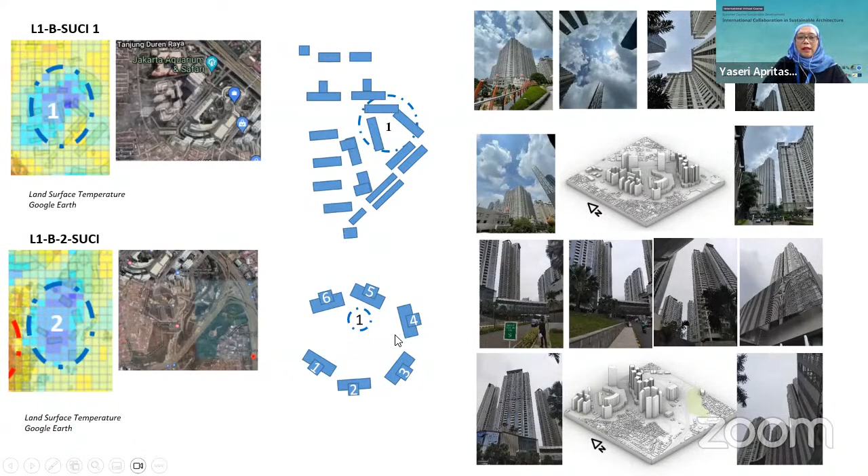Result of the overlay: we can see the blue color. For the geometry, we can see the pattern. The building pattern is cluster. In the 3 locations, we can see the same typology. Let's see every location. In location 1, we found 2 locations with the blue color. It means surface urban heat island low intensity. Around the location is high-rise building. Then location 2 is something like that. Location 3 is the same.

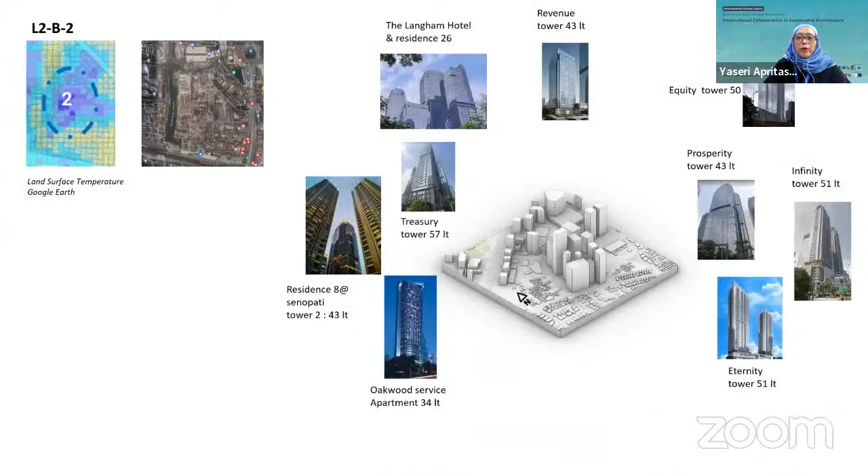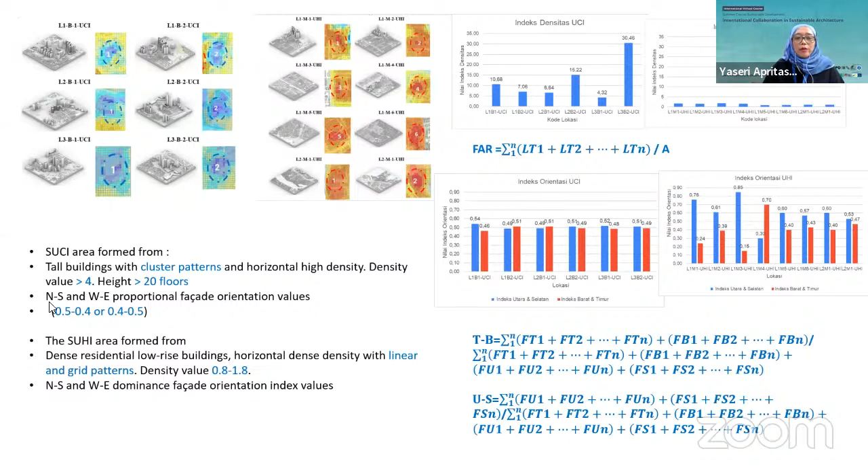Now, we can see the analysis. The surface urban cool island area is formed from tall buildings with the cluster pattern and horizontal high density. Density value higher than 4, higher than 20 floors. And for north, south, west, and east orientation, proportional facade orientation value about 0.4 to 0.5.

And then the surface urban heat island area is formed from dense residential, low-rise buildings, horizontal density with the linear and grid pattern. Density value 0.8 and 1 until 1.8. And then north-south and west-east dominant facade orientation index value. This one is the equation to calculate the value.

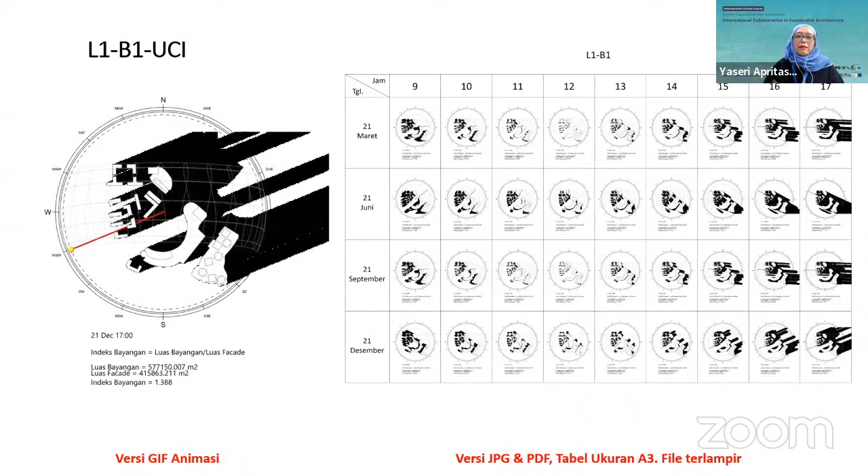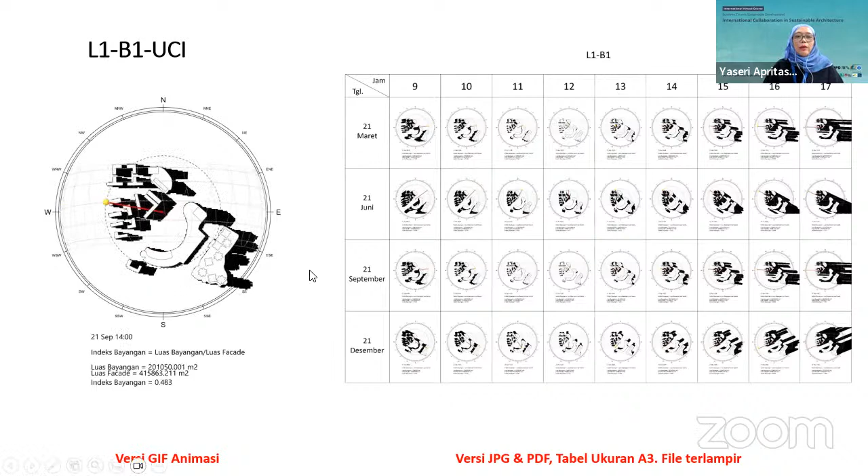And then we can see the shadow in the high-rise building. Because the building is high, it makes a high or large shadow. It can potentially reduce solar irradiation in horizontal material. And we can see in horizontal density the shadow is more small than the tall building.

And then surface urban cool island are formed from the large shadow area from the height of the building, thus forming a canopy and reducing the gain of solar radiation.

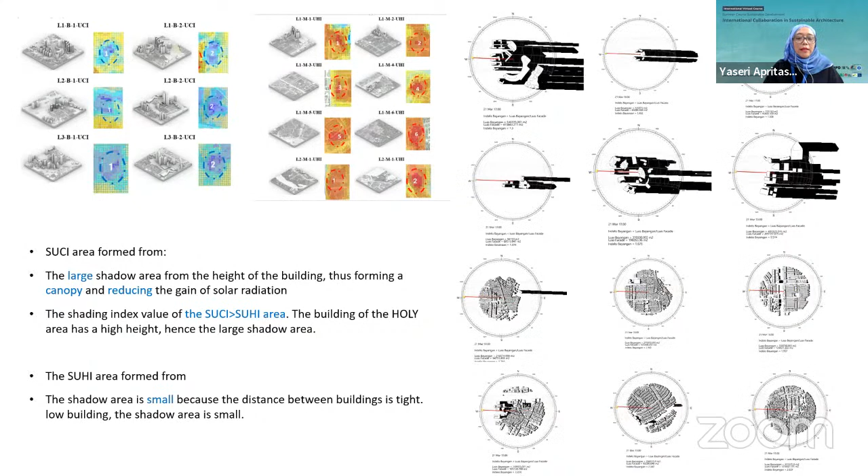The shading index value of surface urban cool island is larger than surface urban heat island area. The building of the surface urban cool island area has high height, hence the large shadow area. The surface urban heat island area formed from the shadow area is small because the distance between buildings is tight. Low building, the shadow area is small.

And then about the material in surface urban cool island: medium softscape, hardscape with the paving and concrete, roofing material concrete and tile, vertical material window to wall ratio 0.5 until 0.85, have heavyweight material composition, brick, walls, concrete, and lightweight glass and aluminum.

And from surface urban heat island area, formed from the material: small softscape with the index 0.04 and 0.15, hardscape asphalt and paving, roofing material tile, asbestos and metal, vertical material window to wall ratio from 0.3 until 0.45. The dominance is the use of heavyweight material.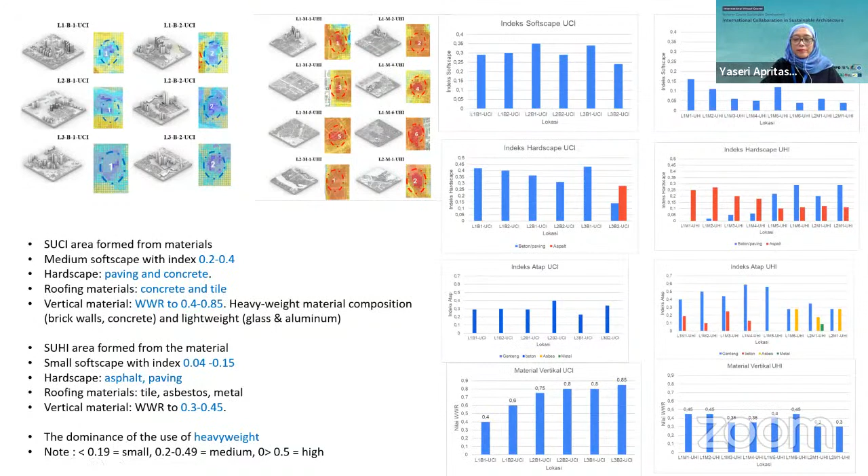And then this last part is comparison of vertical configuration, urban heat island low intensity, and horizontal configuration, urban heat island high intensity. We can see the building mass configuration, building mass pattern, density, floor area ratio, building coverage ratio, orientation, building material, index softscape type, index hardscape, index roof, window to wall ratio, and wall material.

And then the next field study is based on the thermal interpretation. We collect data in field study in surface urban heat island low intensity area and surface urban heat island high intensity area. We collect the data for 24 hours and we took 30 points in surface urban cool island area and 12 in surface urban heat island intensity.

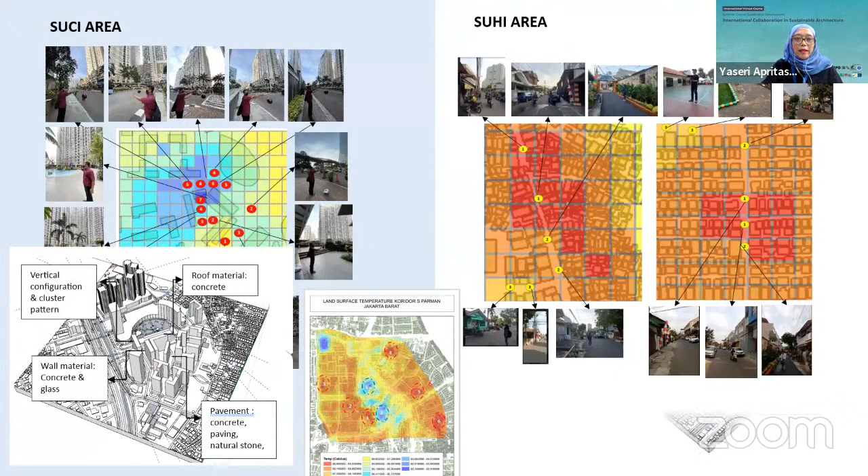We can see the material and the geometry character. The geometry character: vertical configuration with cluster pattern, roof material concrete, pavement concrete, paving, natural stone, wall material concrete and glass. And for the horizontal configuration, grid pattern, roof material tile and zinc, pavement asphalt, wall material concrete, wood and glass.

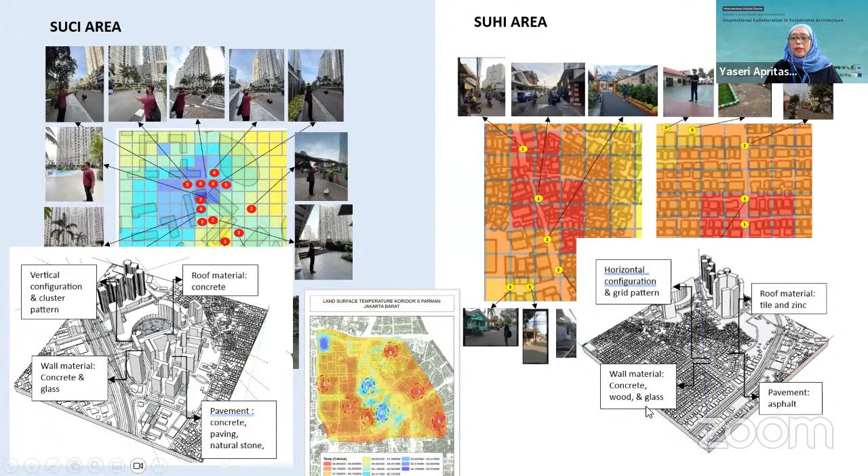Result of the field measurement: the temperature of the horizontal mass configuration is higher than the average vertical mass configuration at 7 until 3 p.m. After that, the condition is the opposite.

And the lowest value of globe temperature is 26.8 degree Celsius at 4 AM, and the highest is 46.1 Celsius, and the globe temperature in the horizontal mass configuration is higher than vertical mass configuration.

The vertical mass configuration area gets heat gain lower than horizontal mass configuration area, but the heat dissipation of the horizontal mass configuration is faster than the vertical area. The vertical mass configuration gains less heat due to shading from the tall building, while the heat dissipation takes longer because the heat is trapped between the buildings and stored in the wide facade of the building.

Humidity in the vertical mass configuration area is lower than the horizontal mass configuration. Wind acceleration occurs between the set lines of tall buildings, and turbulence.

We can see in the graph that the horizontal area is the horizontal configuration, and the surface urban heat island area is red, and for the surface urban cool island it is blue. We can see for the temperature, globe temperature, and relative humidity, the surface urban heat island area is higher than the surface urban cool island area.

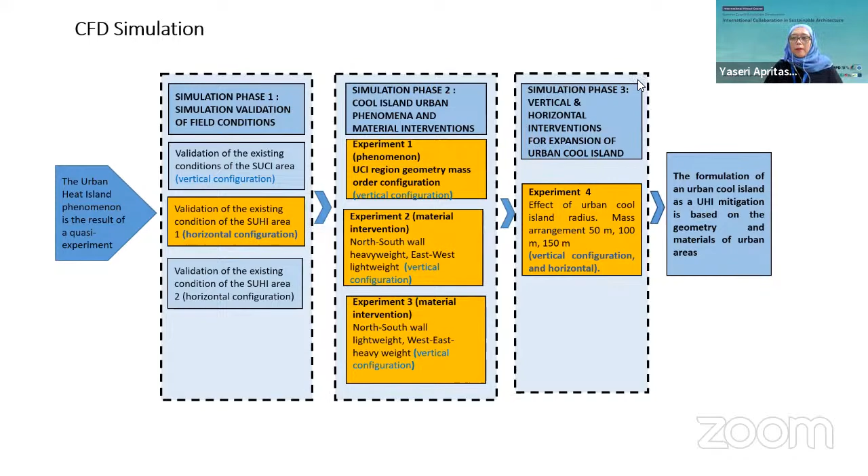For the validation, we simulate the horizontal configuration with the criteria softscape, pavement, roof, wall, same with the existing condition. Then we simulate at 1 p.m., 4 p.m., and 8 p.m.

And then we can see the simulation and the analysis so that we compare the field study and simulation. We can see the simulated temperature is higher than the field temperature.

Relative humidity in simulation is lower than in the field. Air velocity in simulation is higher than air velocity in the field. And we calculated overall deviation value of 0.15. So simulation CFD can be used.

Then we move to phase 2, urban cool island phenomenon. This one is vertical configuration condition with the criteria softscape, pavement, roof, wall, window to wall ratio, same with the existing. We use the same phenomena approach, and we can see the result.

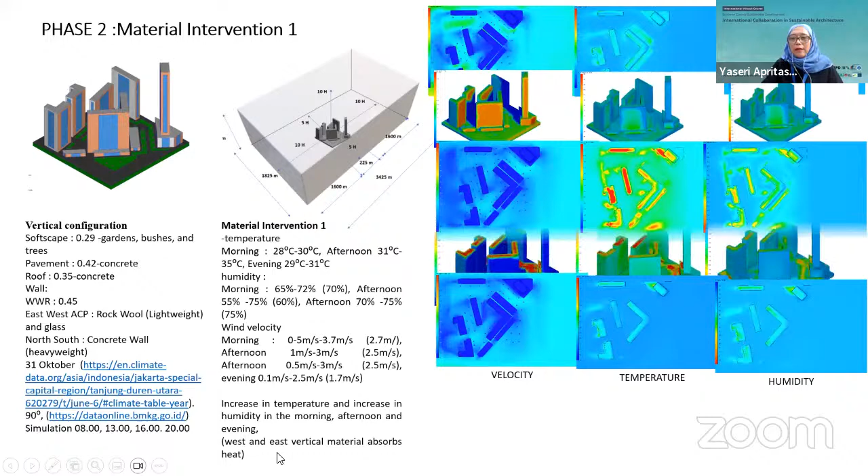For the next material intervention, we changed the material on the north and south sides with lightweight ACP and rock wool. In summary, there is an increase in temperature in the morning and afternoon; the vertical material on the north and south sides absorbs heat.

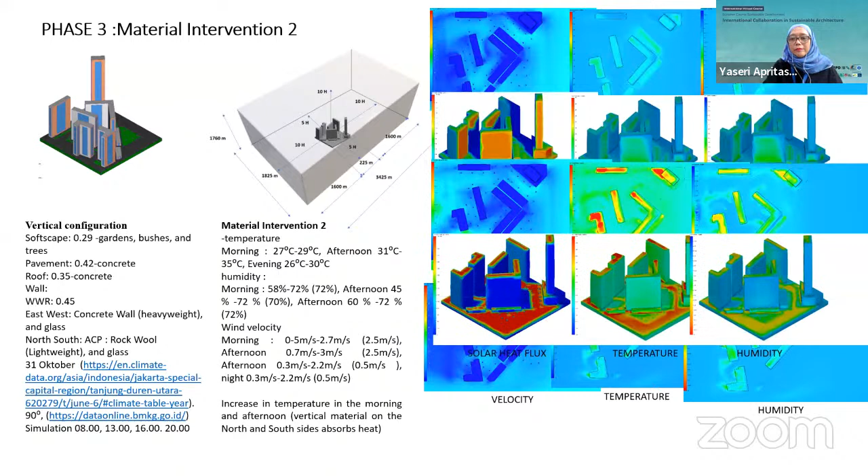And last, phase 3: expansion of the urban cool island. Based on the experience from material intervention 2 and material intervention 1, we just used the existing material, and we redesigned again the vertical configuration mixed with horizontal configuration.

In the middle is the vertical configuration, and above, below, on the left side, and on the right side we use the horizontal configuration with criteria same as the existing. We want to explore the wind velocity and wind flow from the vertical configuration to the horizontal configuration.

And the result, this one is the circle showing 50, 100, and 150 meters. We want to explore the expansion radius from the vertical configuration. Wind speed expansion in the morning is lower than 50 meters.

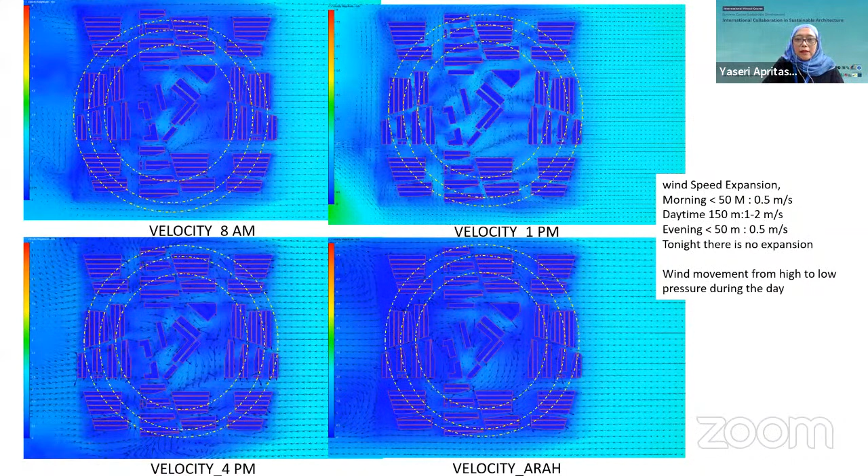For 1 meter per second, in the morning, wind speed expansion is lower than 50 meters. In daytime, it reaches 150 meters. In the evening, lower than 50 meters. At night, there is no expansion. Wind movement goes from high to low pressure during the day.

We can see that with both 3 meters per second and 1 meter per second, there is a different temperature among the locations.

And the last conclusion: the geometric shape and configuration of tall buildings generally change airflow pattern, speed and direction, solar radiation gain, relative humidity, and globe temperature. The phenomenon of vertical building configuration with cluster pattern has lower air temperature than horizontal building configuration with grid pattern. This factor significantly shapes the climate of urban areas.

Based on the geometrical and material characteristics of high-density urban areas as microclimate, it can be formulated that the urban cool island is one of the urban heat island mitigation strategies.

First, configuration of vertical geometry with cluster mass arrangement. Second, material on the east and west sides. Third, expanding the softscape index with the composition of garden, vegetation, shrubs, and trees.

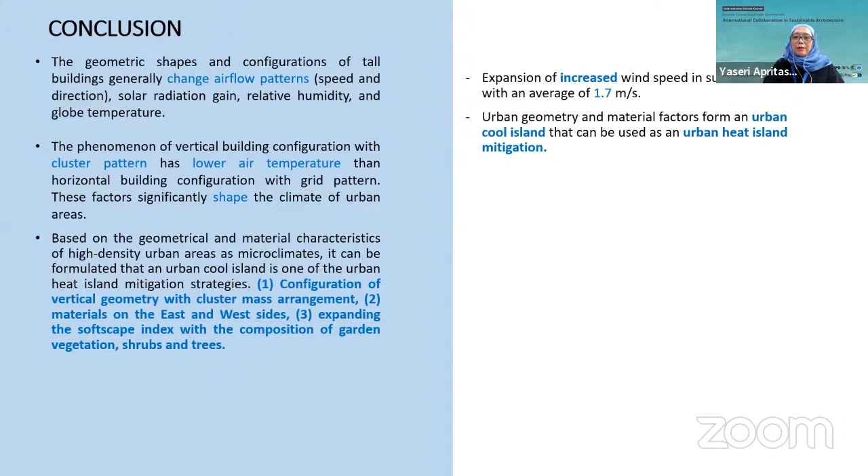And expansion of increased wind speed in summer higher than 150 meters with an average of 1.7 meters per second. Urban geometry and material factors form an urban cool island that can be used as urban heat island mitigation. Thank you very much.

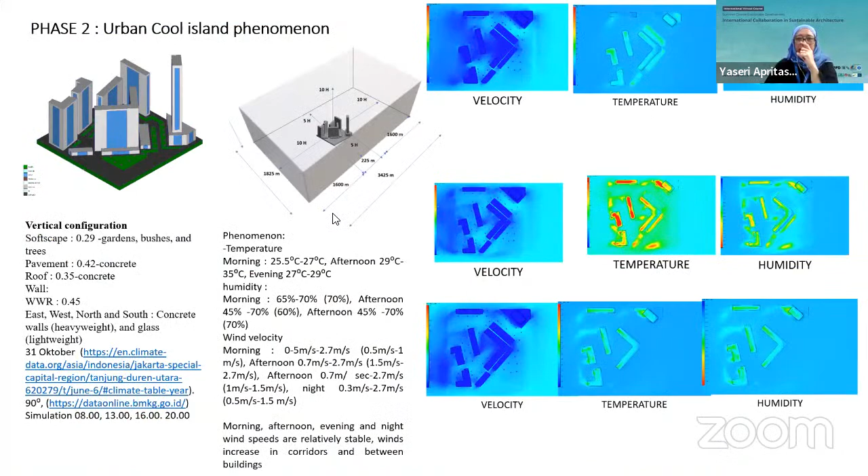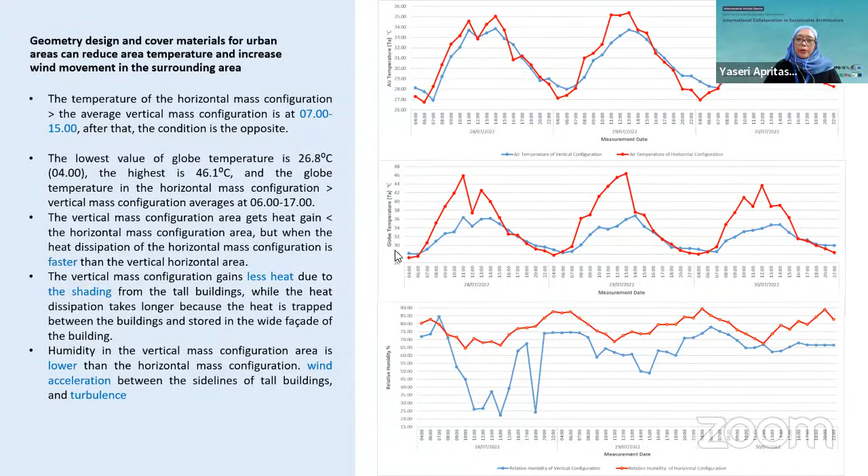The red location, so the temperature result from the ground measurement is higher than the blue, for both the air temperature and the globe temperature. And then, actually, the citra thermal or Landsat interpretation shows that temperature. Based on this, we can decide that the validation and confirmation with ground measurement is valid, Pak.

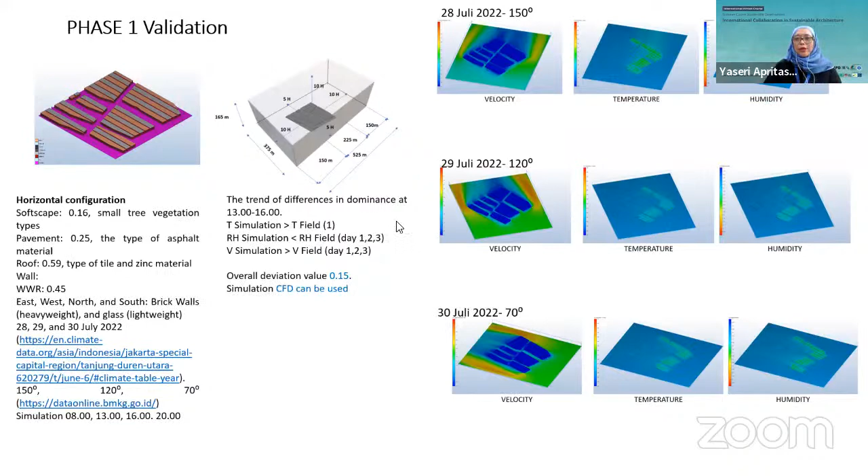Now, based on the ground measurement, we move to CFD simulation, yeah, done with validation of the existing condition. We can see the overall deviation value is 0.15, so that simulation CFD can be used. Maybe I can explain more if there's a question?